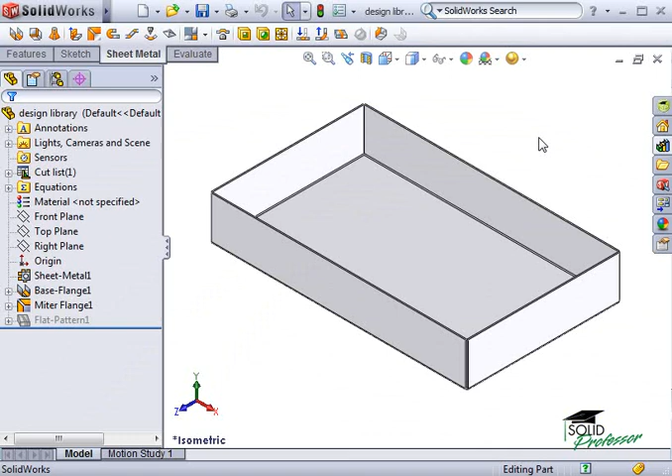If the forming tool you need does not exist in the design library, you'll have to create it. You can start from scratch, or you can edit an existing forming tool that's similar to the one you need. In this lesson, I'll edit the bridge lance from the lances folder. All I have to do is right-click it from the design library and choose Open.

It'll open in its own window, and you can see that it's just a part. Notice that the part has yellow and red faces. The colors are very important. The red color tells SOLIDWORKS that these are the faces to remove once it's inserted into a part.

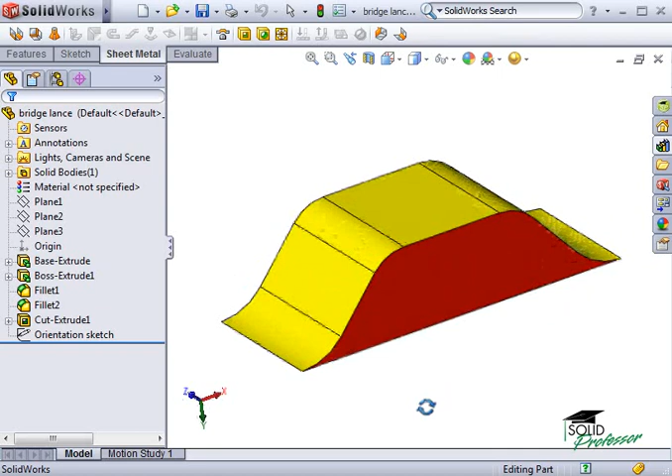As I use the rollback bar in the feature tree, you can see how the part was created. A base was made first, and then the geometry of the bridge lance. At the end, the base was cut away and a sketch was added. This sketch is used to position the feature when it's inserted into a part.

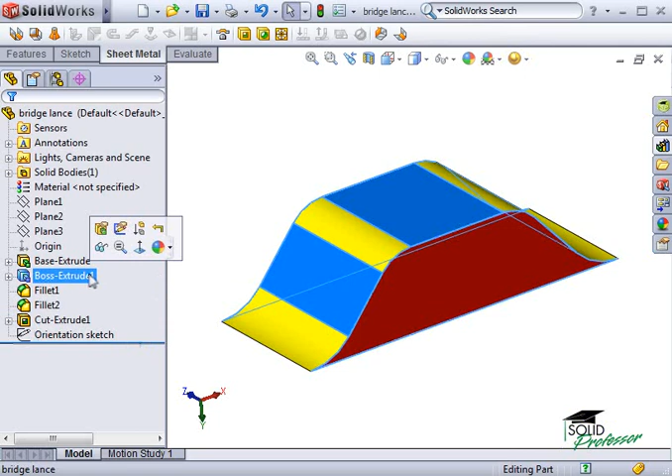I'll edit the sketch of the boss extrude and change it to have only one angle face. Once I exit the sketch and the part rebuilds, there will be errors on the fillets because of the changes I made. I'll edit the fillet feature and let SOLIDWORKS remove the non-existing edges.

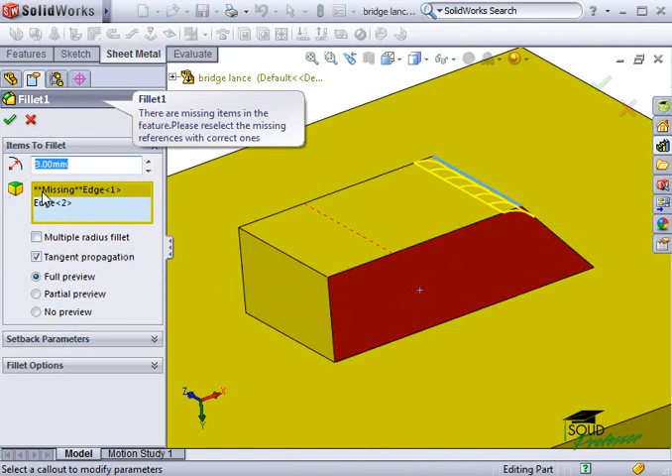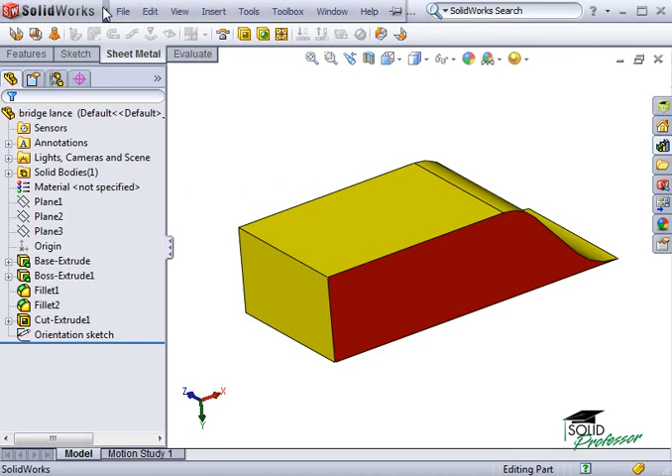Once the errors are repaired, I'll add the red color to the new flat face I created. Once again, the red color tells SOLIDWORKS to remove this face from the target part. Rather than manually changing the color of the face, I can use the Form Tool feature to have SOLIDWORKS do this for me. You'll find the Form Tool feature under Insert, Sheet Metal, Form Tool.

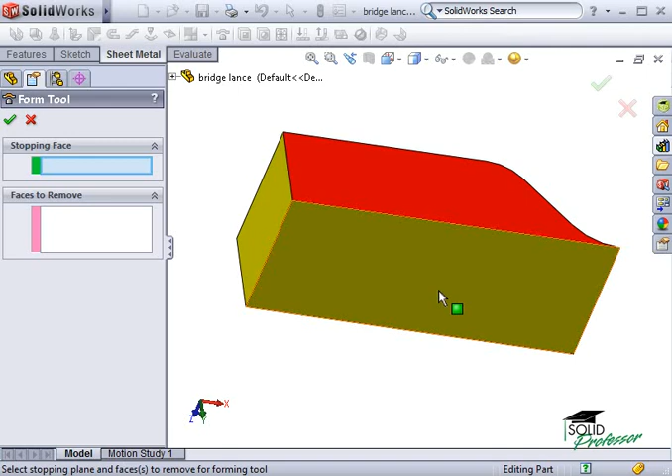This feature does three things for you. It defines a stopping surface, defines faces to be removed, and automatically creates an orientation sketch to help position the forming tool. The stopping face determines how far the forming tool will be pressed into the sheet metal. In this case, the stopping face is this one on the bottom, and the face to remove is this flat one.

I'll click OK, and you can see the face color is changed to red, and the stopping face is shown in cyan. In the FeatureManager, you see the Form Tool feature has been added along with an orientation sketch.

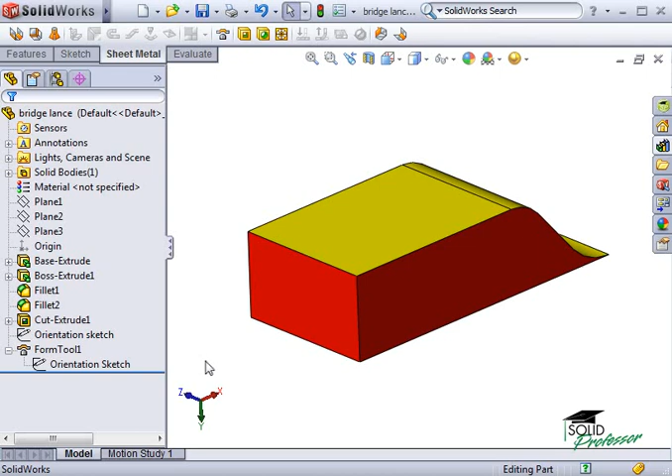It's important to note that forming tools created prior to SOLIDWORKS 2006 did not use the Form Tool feature. Instead, faces to be removed had to be manually set to red, and orientation sketches had to be manually created. Also, there were no options for stopping faces. Instead, the top reference plane always served as the stopping face.

Now back to our example. My editing is complete, and I'll do a Save As from the File pull-down menu. I'll save it in the same folder as the original part. It's important to do a Save As instead of Save, or you'll overwrite your original bridge lance.

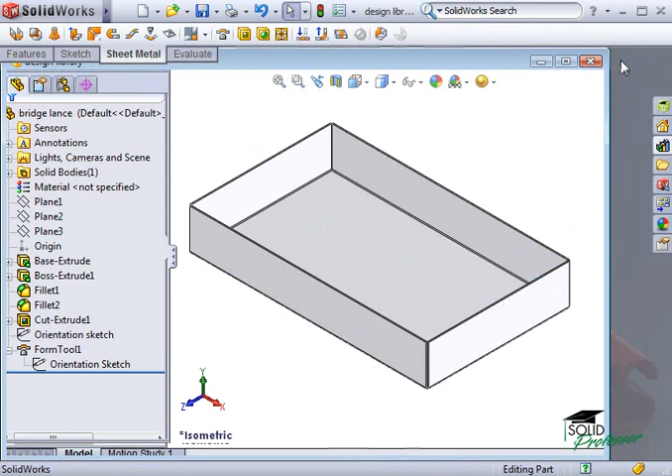When I browse to the Lances folder of the Design Library, I can see the new forming tool I created. The preview of the forming tool comes from the view of the part that was on the screen when I saved it earlier. I can now drag it onto my sheet metal part and use the Tab key to change its direction.

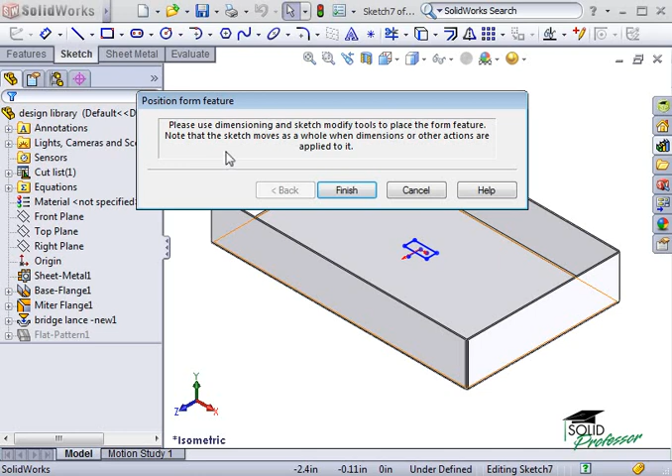Next, I'll use the Sketch Modify tool to turn the feature 90 degrees. You can find the Sketch Modify tool in the Tools, Sketch Tools drop-down menu. I'll type in 90 degrees and press Enter to rotate the sketch. This is the only change I'll make, so I can close the Modify box and click Finish to complete my custom forming tool.